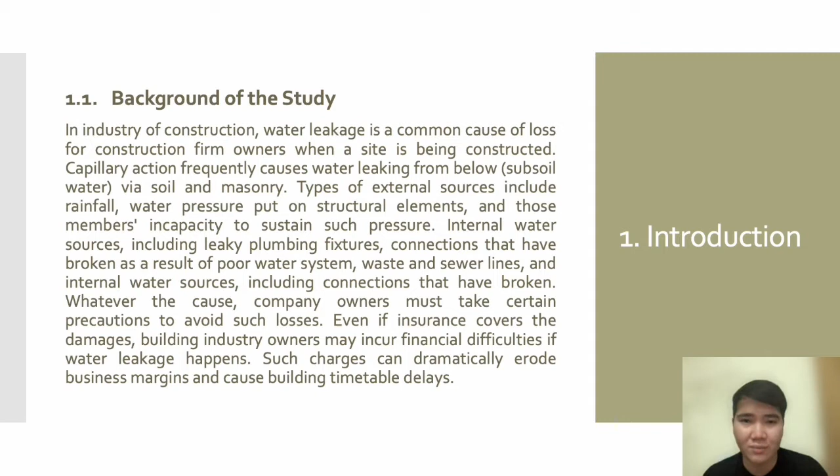Significance of the study: it is challenging to pinpoint the precise cause and sources of the structure's water leakage. Water flows via an invisible system of capillaries, air pockets, and permeability pathways that cannot be seen or traced back to the original source. Water may enter from one location and become visible at another.

As a result, before implementing corrective actions, the various sources of leaks should be identified and understood. It is likely that inhabitants may experience discomfort as well as unsightly looks, unhygienic conditions, and occasionally sicknesses, if concern is not made to their prevention at every stage of the design process, implementation, and management, even fixes that are out of reach and impractical.

The researchers believe that Six Sigma DMAIC might tackle the lingering problem of water leakage in the construction industry. Also, with correct DMAIC implementation, businesses may benefit in a number of ways, including reducing the cost of poor quality, increasing revenue, and overall enhancing corporate performance and efficiency. Furthermore, the research identifies a necessity to solve this issue because leakage is one of the major issues in many structures, not only during the construction phase, but also throughout the completion stage.

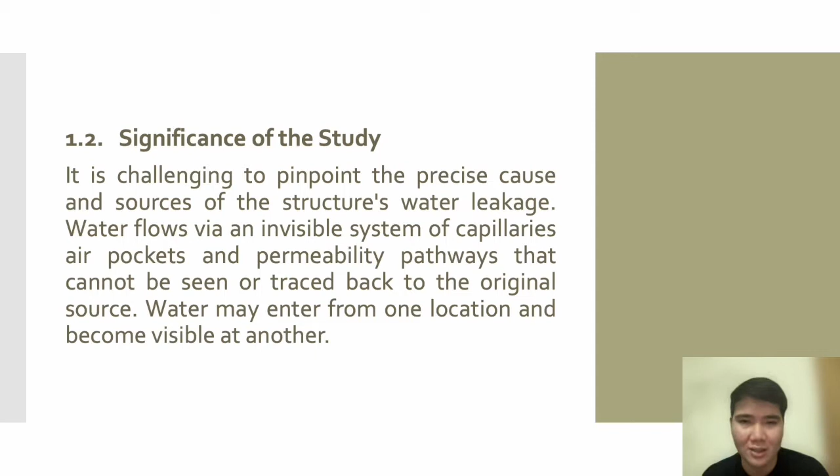Objectives of the study: to be successful in a developing country like Qatar, companies must continually improve their procedures. Offering high-quality goods and services has evolved into a competitive edge, as well as a necessity for sustainability. Organizations utilize a variety of methods to strengthen the services and quality of their products. One such approach is DMAIC, a problem-solving methodology created by Six Sigma.

This study aims to show how Six Sigma and DMAIC may be experimentally used to eliminate product defects brought on by water leakage from one of the projects of a reputable Qatari construction company, China Railway 18 Bureau Group, WLL. The in-depth research focused on cases of water seepage or leakage at the proposed luxury hotel building's basement areas, where the DMAIC tool would be utilized to ensure that similar water leakage concerns do not emerge in the future.

Now let's move on with the methodology. The DMAIC technique was taken into consideration since the research aimed to enhance the current business process. The DMAIC approach takes a situation that a company has defined and applies a number of tools and strategies logically

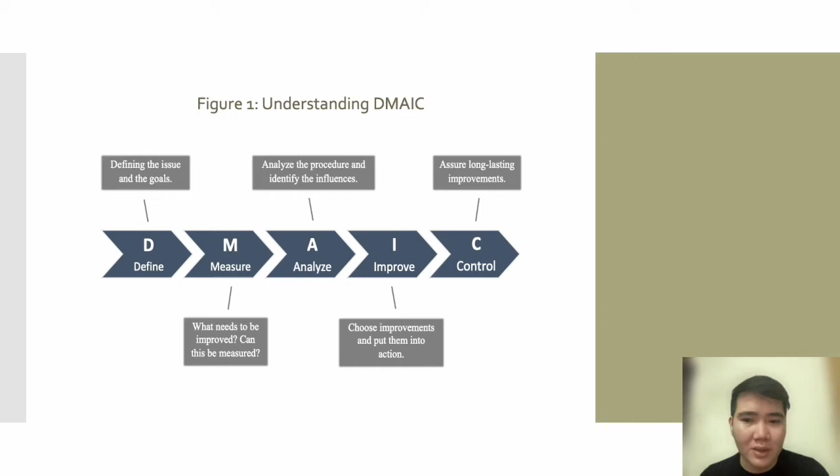This research will concentrate on water leaking in basement areas. Water seepages and leaks in basement are time-consuming and expensive to repair. Extensive study has been conducted to examine the nature of the problem, its underlying causes, and potential remedies. Figure 1 depicts how to understand the DMAIC technique.

For the data collection, the research focused on incident of water seepage leakage at one of the construction sites in Doha, Qatar, the proposed luxury hotel building, from May 25, 2022 to June 11, 2022, specifically in the basement 3 area where the leakage occurred.

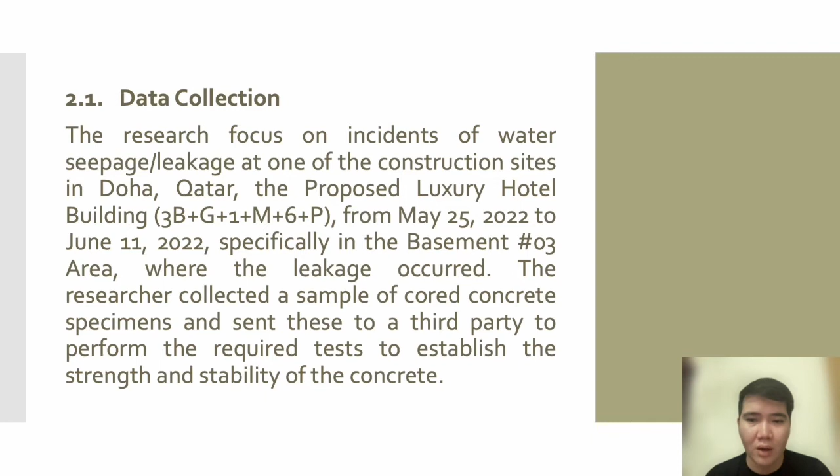The researcher collected a sample of cored concrete specimen and sent this to a third party to perform the required test to establish the strength and stability of the concrete. Data collected will be used to analyze the concrete problem. Furthermore, the study focused on how to resolve the problem of water leakage on the construction site.

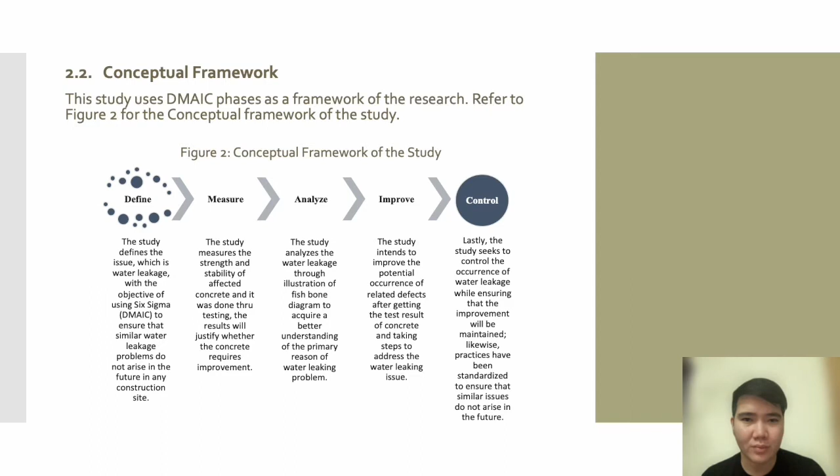For all the data that we gathered, let's move on to the results and discussion. The goal of this study is to use 5 procedures in connection to water leaks to improve and optimize the construction processes and outcomes. The study discovered and used the following 5 steps in the construction process.

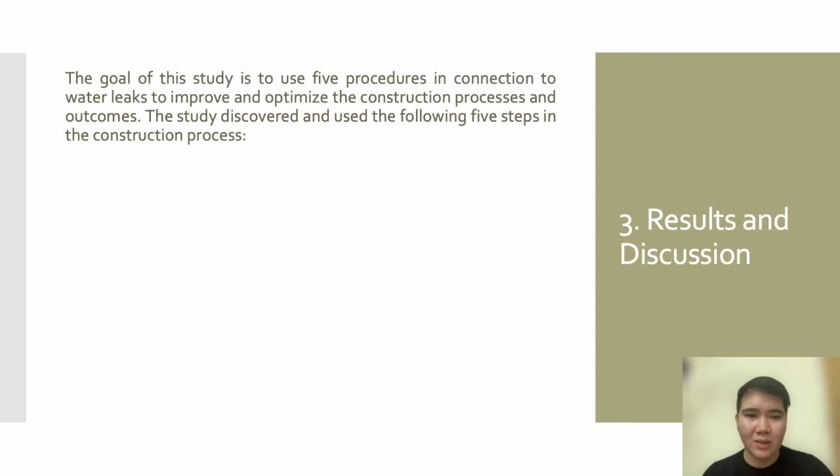First is the define. The project boundaries and purpose are attempted to be established at this phase, together with the client's viewpoint and the project objectives. However, before this part of the project can be established, the Six Sigma team must be constituted.

Furthermore, Pande et al. state that listening to consumers is crucial for business success in order to determine the aim of the particular project depending on client needs. Customer reviews entail learning what customer want and evaluating specific expectation shown in this project. Furthermore, it ensures that moving ahead, the development team and organization will continue to put their major attention on the project problem of defect elimination.

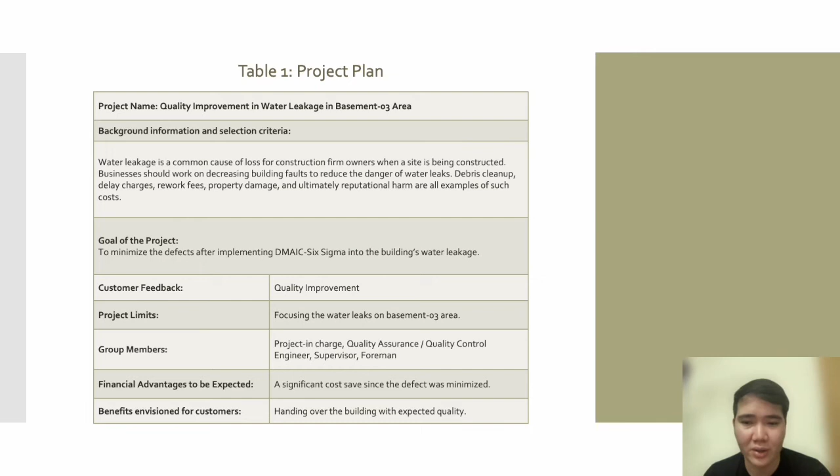Last but not the least, a project plan document used to record the project goals and other essentials from the outset was used to explain and illustrate the data design of the project. In other words, the project plan summarized the project name, background information, goal, customer feedback, limits, group members, and financial advantage to be expected, and benefits envisioned to customer, which is shown in table 1.

Next phase is measure. This stage of the problem-solving process entails developing precise measures to help track advancement towards the objective, which in this study was to reduce the quality defects in the basement area, namely the water leakage.

The measure phase in this project explicitly referred to the development and selection of acceptable metrics for locating the main issues that required attention. To guarantee that the data was gathered effectively, a collecting strategy was established as well.

One of the measures proposed was simply the testing of the concrete core on the affected area of leakage. These parameters were the process sigma level and the quality level, as determined by defects per million opportunities, or DPMO.

Following the definition of the defective concrete test result, the DPMO and sigma level of the concrete with water leakages were determined. According to the record of the company, there was one major type of defect that contributed to the water leakage. The improper application of chemical injection was the one major flaw.

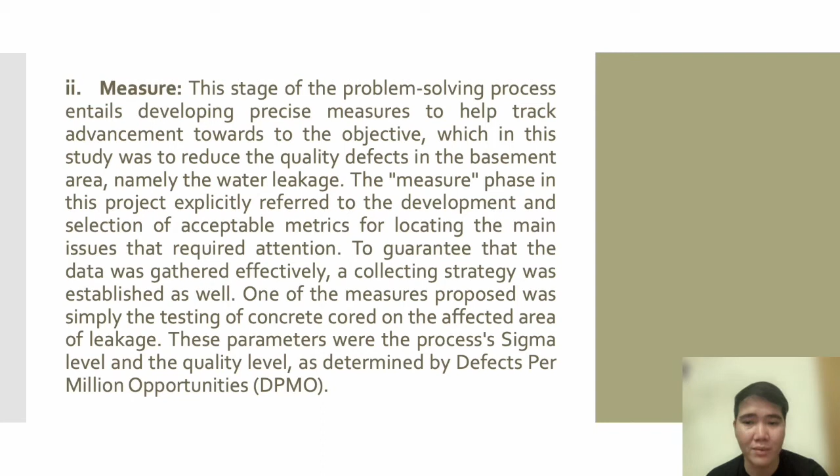The leak defect was characterized for this study as basement flooring with a water leak appearance on the surface, and this water leakage area is submitted to quality testing. If the quality test on cored concrete fails, it is possible that they may chip more concrete and take another sample for testing until the test result is passed. The test result data was gathered over a few days.

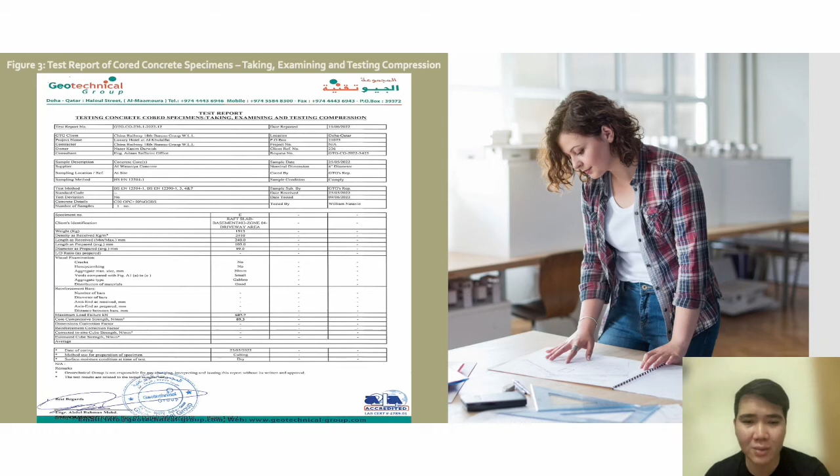Figure 2 and 3 is the full detail of the test report, and Table 2 summarizes the findings.

For this test result summary, you can see that we have 5 numbers of samples and sample B is cancelled as per consultant request. Furthermore, as we see from the table, all sample actual strength passed compared with the required strength, which means no more additional cored sample test is required.

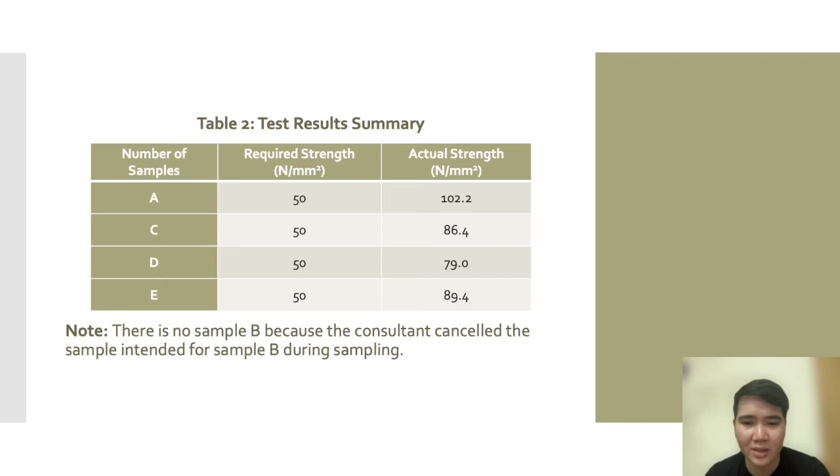The next phase is analyze. In this phase, the water leakage in basement 3 is widespread, and it is unknown whether the chemical injection will be successful in all affected areas. In order to effectively identify and address this issue, the company, or perhaps the site, will first perform an analysis of data, guided by an investigation to recognize and comprehend the problems' underlying causes.

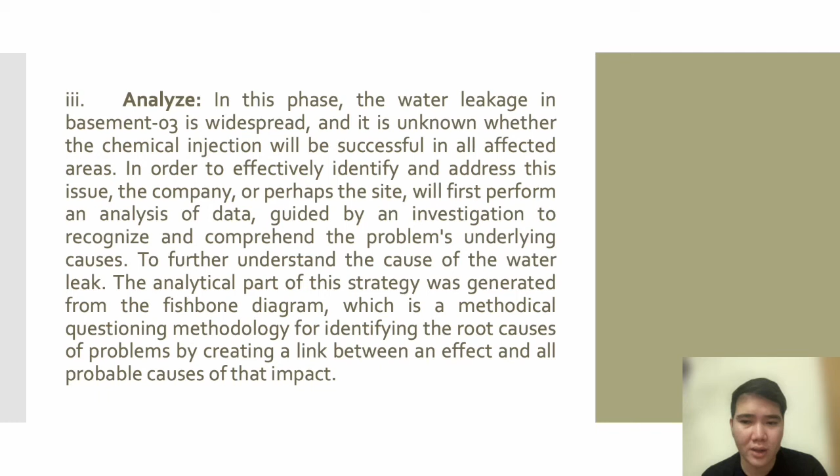To further understand the cause of the water leak, the analytical part of this strategy was generated from the fishbone diagram, which is a methodical questioning methodology for identifying the root causes of problems by creating a link between an effect and all probable causes of that impact. When complete, the diagram gives recommendations for future growth and assists in identifying the underlying problems.

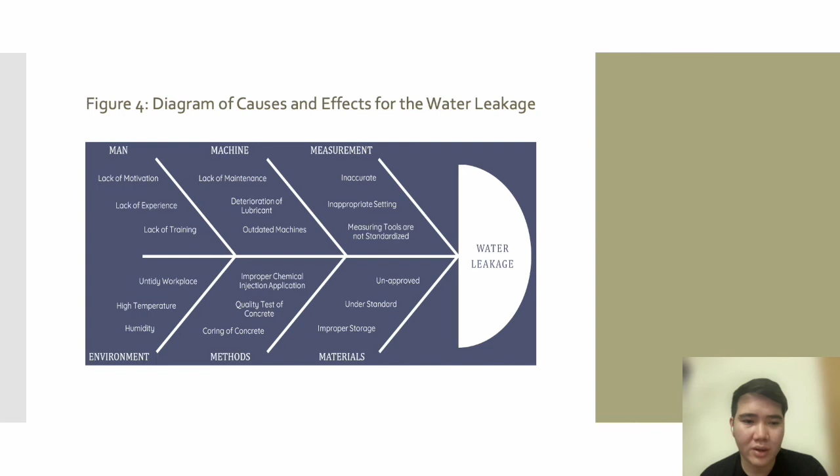The mentioned potential underlying reasons are shown in a cause and effect diagram in Figure 4. The main effect will be the water leakages and the cause for each category, which is man, machine, measurement, materials, methods, and environment.

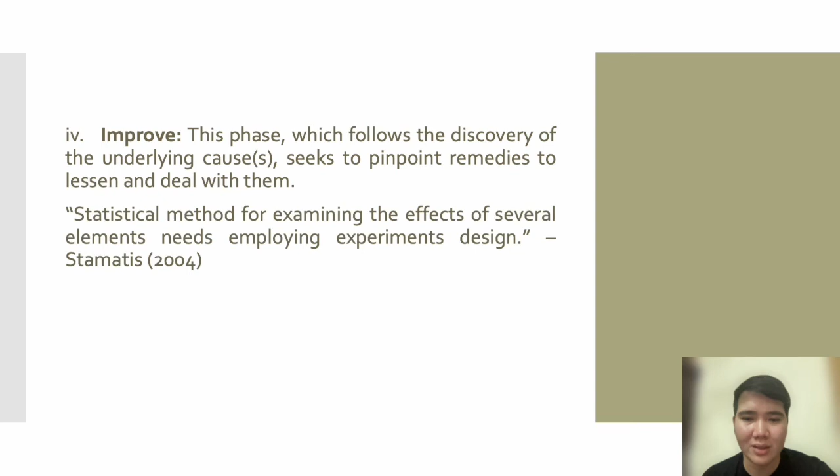The next phase is improve. This phase, which follows the discovery of the underlying causes, seeks to pinpoint remedies to lessen and deal with them. In the improve phase, which is referred to as a statistical method for examining the effects of several elements, Stamatis suggests a statistical method for examining the effect of several elements, needs employing experiment designs.

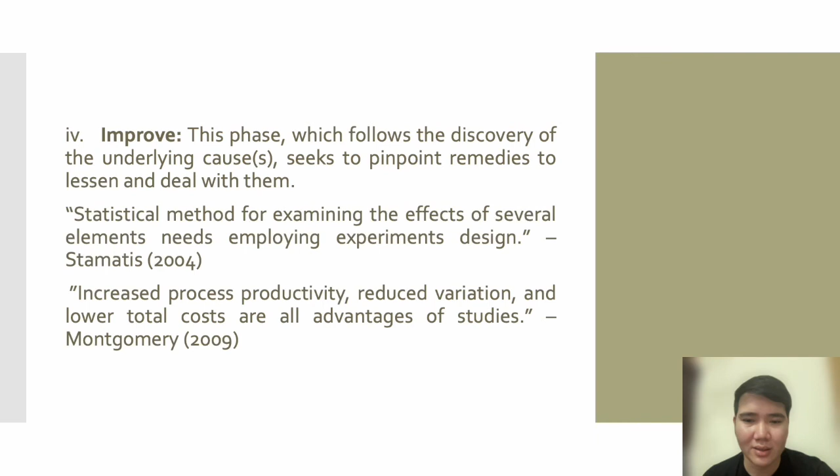Montgomery claims that increased process productivity, reduced variation, and lower total cost are all the advantages of such studies. After receiving the test result and taking action to address the water leaking issue, it is possible to draw the conclusion that the probability of similar defects occurring will be minimized.

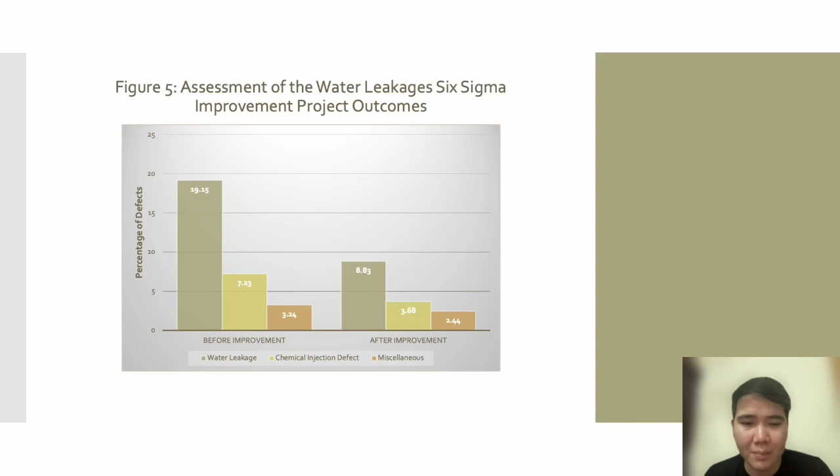The last phase of the DMAIC process is control. Control methods, frequent performance assessment, increased follow-up quality, and enhanced process standardization and documentation. The practices have been standardized to ensure that similar issues do not arise in the future.

It is addressed how Six Sigma DMAIC may be used to improve the quality and efficiency of building projects, as well as to reduce the need for major structural repairs as a result of water leaks. System analysis is conducted at this point of the improvement technique.

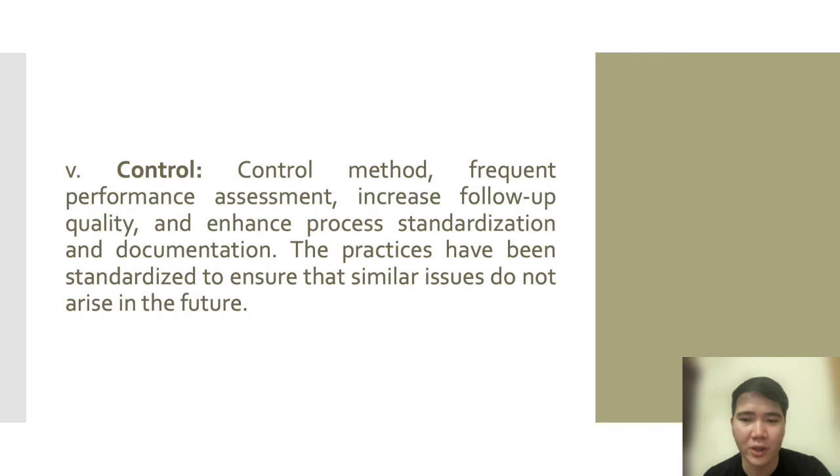And last, for the conclusion. This research provided a successful case study of how to lessen defects in a construction company's water leaks by utilizing the problem-solving technique of DMAIC and the concept of Six Sigma. Because of this, the results may be applied by construction projects as a guideline for implementing certain efforts for continual improvement in their companies, such as the one discussed in this paper.

Following the analysis conducted during the analyze and improve phases of the DMAIC, the initiative reported in this study showed that the early detection of water leakage and accurate repair of it by injection had a statistically significant impact on lowering the cost of poor quality.

Taking all of this into consideration, a decrease in the number of defects was achieved by determining the concrete test report of cored concrete and implementing remedial actions after receiving the test result.

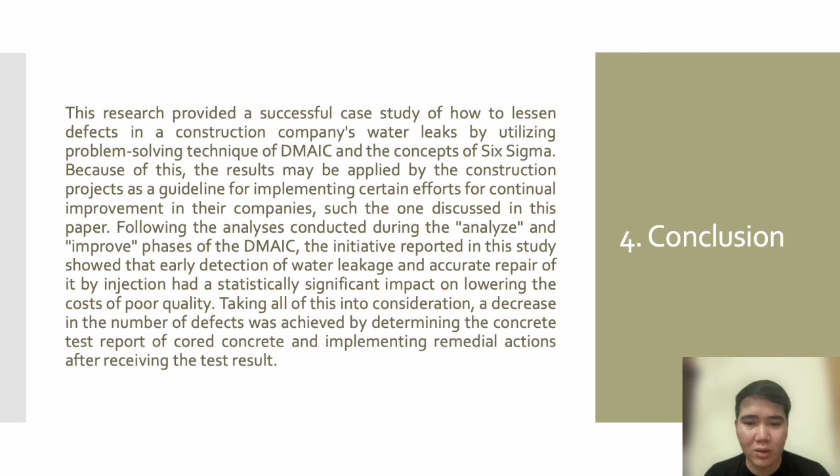Furthermore, this study was a pilot project meant to experimentally show the China Railway organization that DMAIC problem solving and Six Sigma methodology are efficient ways capable of enhancing its poor quality and cost saving by effectively addressing the water leakage defects. This demonstrates that advantages like higher revenue, better business performance, higher quality products, and higher customer satisfaction are anticipated, as long as the company maintains its embrace of Six Sigma within its continuous improvement, and employs its concept and core principles to methodologically address quality issues.